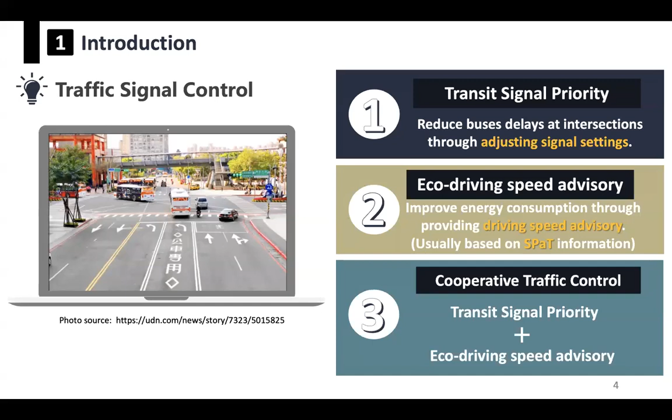Some studies have integrated both of them and call it cooperative traffic control. We have reviewed some TSP, transit signal priority, papers and eco-driving speed advisory papers. We noticed that some papers have proposed cooperative traffic control, but most of them are developed based on the assumption that the buses are operating on an exclusive lane. So the motivation is to implement cooperative control on electric buses under mixed traffic circumstances.

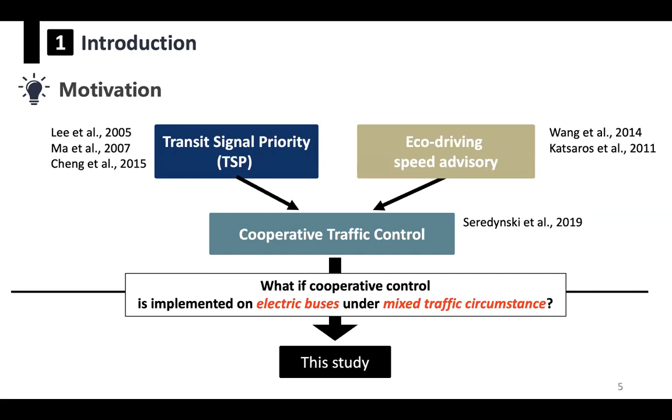Here comes the methodology. We call the system we propose in the study cooperative active transit signal priority, in short ATSP-C. It can be separated into three components. The first component is the detection of the bus. Once the system detects the bus, the RSU, roadside unit, will predict bus arrival time and calculate its passing probability. If the probability is less than a user-defined threshold, then it will calculate TSP strategies.

In component 3, the RSU will send signal timing information to the OBU, the onboard unit. The onboard unit is assumed to be installed on all electric buses. So the OBU will get the signal timing information and calculate eco-driving speed. Okay, this is the structure of the system.

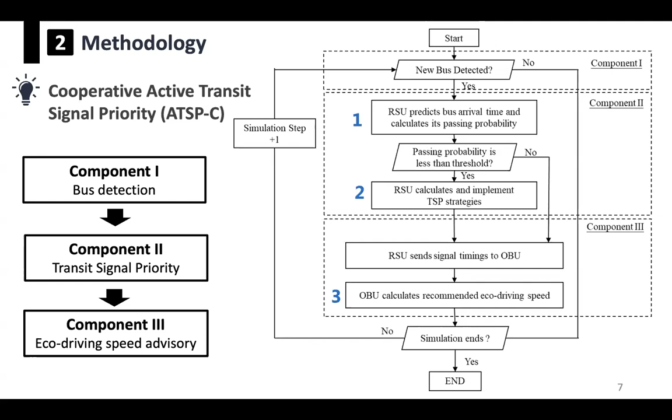The first one is the computation of intersection passing probability. Basically we assume that the arrival time of the buses at the intersection is a random variable that follows a normal distribution. So with the signal timing information, we can get the passing probability by the cumulative density function and by integrating over the green durations.

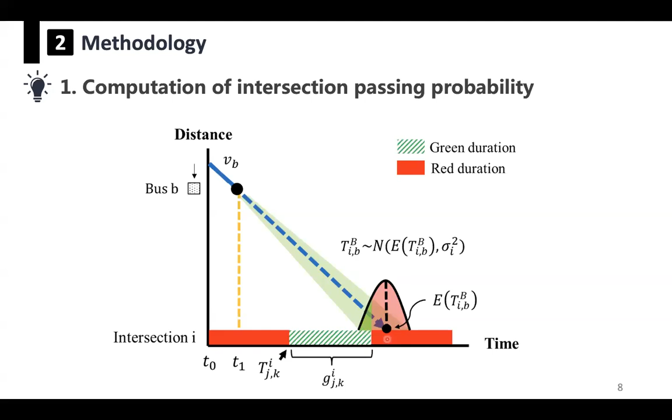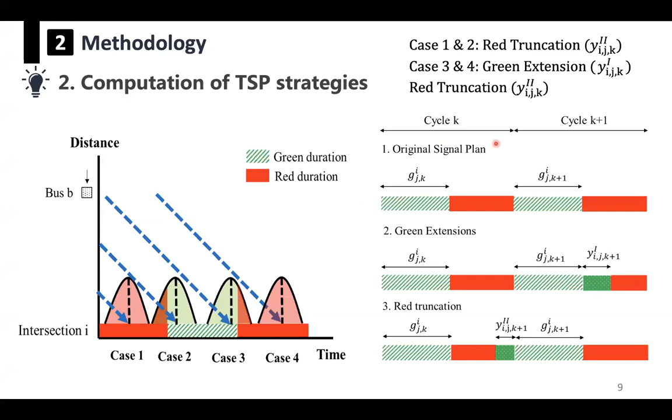For the computation of TSP strategies, we separated it into 4 cases. Case 1 and case 2 will adopt red truncation, and case 3 and case 4 will adopt green extension and red truncation. Here's the flow of how to compute the TSP strategies. Step 1 is to identify the case, and then we will initialize these 2 variables. This variable YIIJK stands for the amount of red truncation, and this is for the amount of green extension. We will initialize them as 0.

In case 1 and case 2, we will try to increment it. In case 3 or case 4, we will first test if the green extension value has reached the maximum priority value. If it's not, we will try to increase green duration. Else we will set it as 0 and try to truncate red duration. In step 4, we will compute the passing probability accordingly.

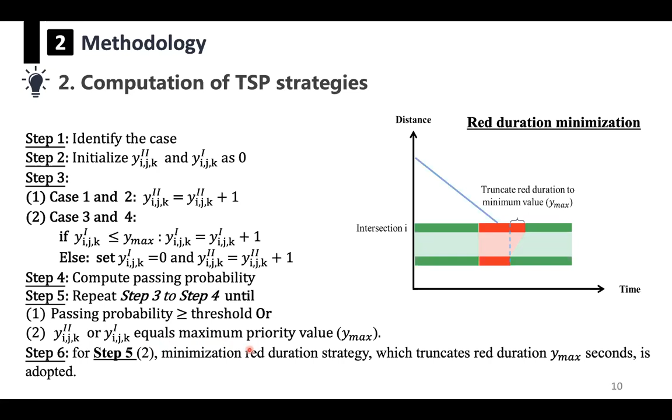In step 5, we just repeat step 3 to step 4 until one of two conditions is fulfilled. The first is the passing probability has become larger than the user-defined threshold, or the second one is one of the two variables equals the maximum priority value Y max. If this condition is fulfilled, then we will use the minimization red duration strategy.

Okay, here comes the eco-driving speed advisory. Similar to the TSP strategy, the system will predict bus arrival time at the intersection and calculate the passing probability. If the probability is less than the threshold, then it will compute the speed advisory.

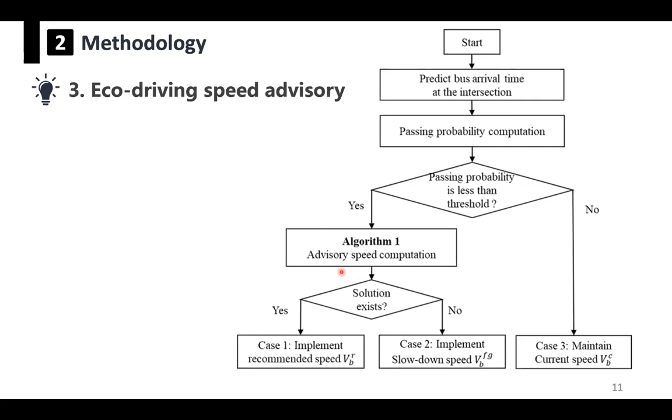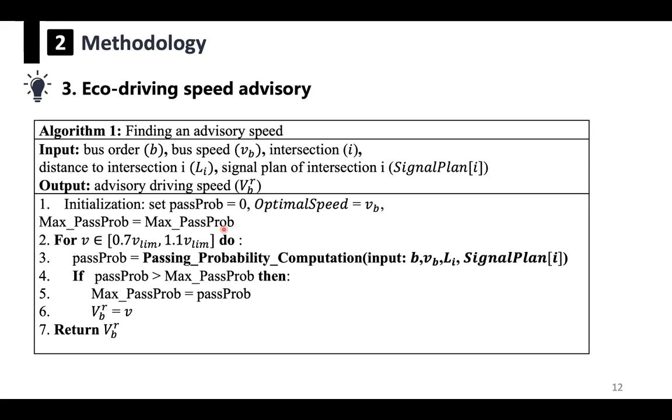The algorithm of computing a speed advisory: the objective is to find the advisory speed that can maximize the passing probability. It's an enumeration method that selects from a range. The range is 0.7 multiplied by the speed limit of the road to 1.1 multiplied by the speed limit of the road. If the method cannot find a speed V that fulfills our requirement, the system will advise gradually slowing down.

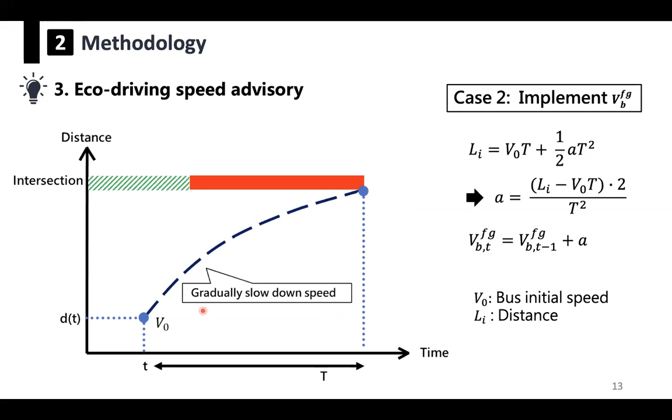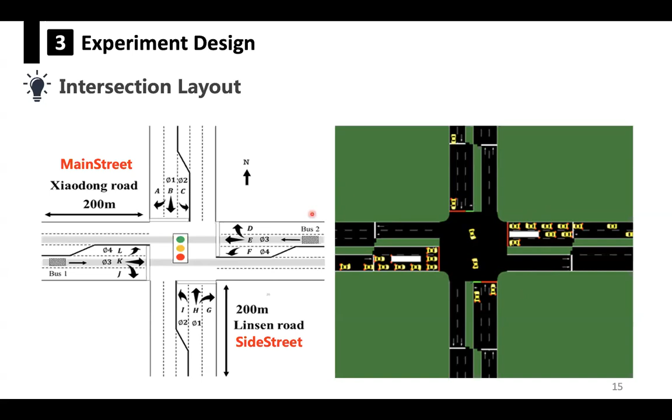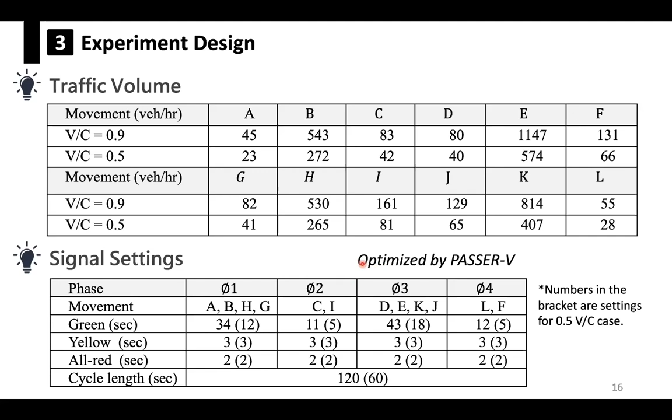Here's the experiment design. A real intersection located in Tainan City, Taiwan, is adopted as a case study. This is the layout of the intersection, and this is how I implemented it in the SUMO simulation. This is the traffic volume we adopted. We adopt two types of traffic volume: one is V/C 0.9, the other is V/C 0.5. The signal settings are listed in the tables. There are 4 phases, and the signal setting has been optimized by PASSER-V.

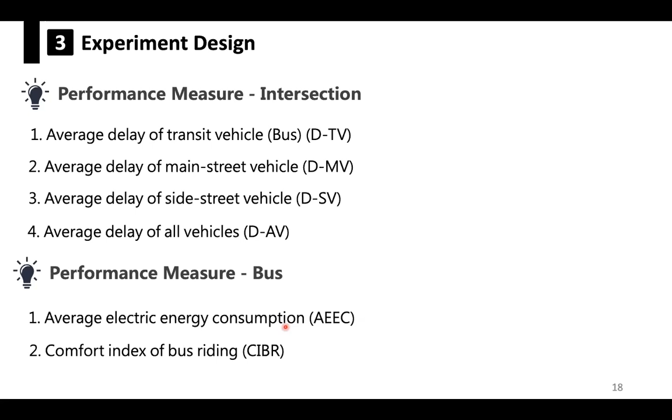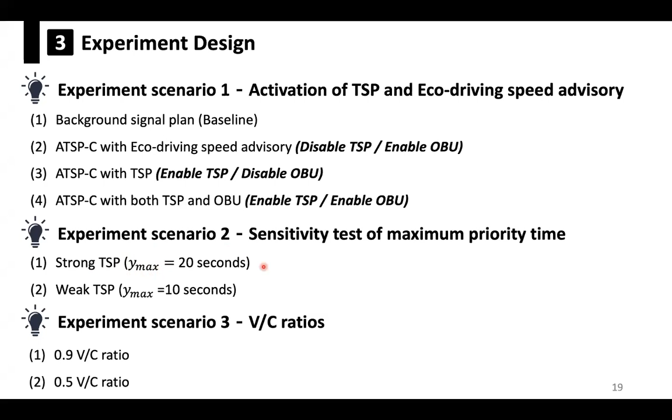We designed 4 scenarios. The background signal plan serves as a baseline. The second one disables TSP and only enables eco-driving speed. The third one enables TSP, but we do not use eco-driving speed. The fourth one enables both TSP and OBU. We designed 2 types of TSP. The first one is strong TSP, where the Y max is 20 seconds, and for the second one it is 10 seconds. Here's the result.